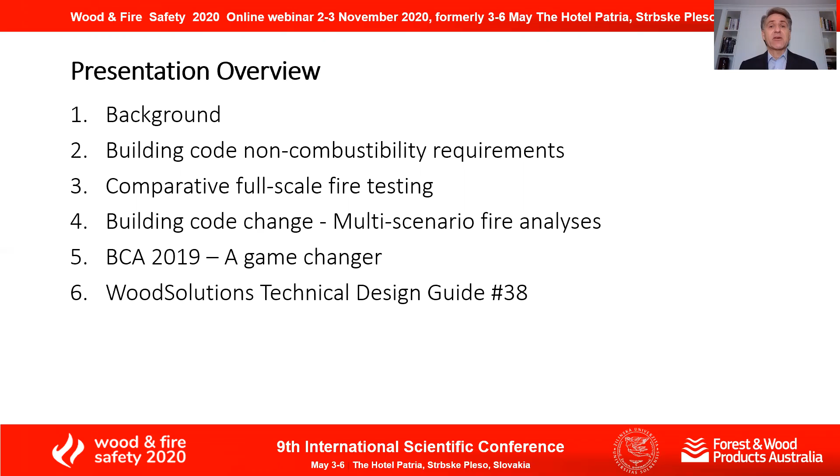Today I'd like to talk to you about the work done to enable a building code change for 8-storey timber buildings in Australia. I'll give you background on where timber construction has come from in Australia, talk about the building code non-combustibility requirements, the comparative full-scale fire testing, describe the multi-scenario fire risk analyses undertaken to enable the code change, describe what the code change is, and give background on where you can find further information on the fire analysis.

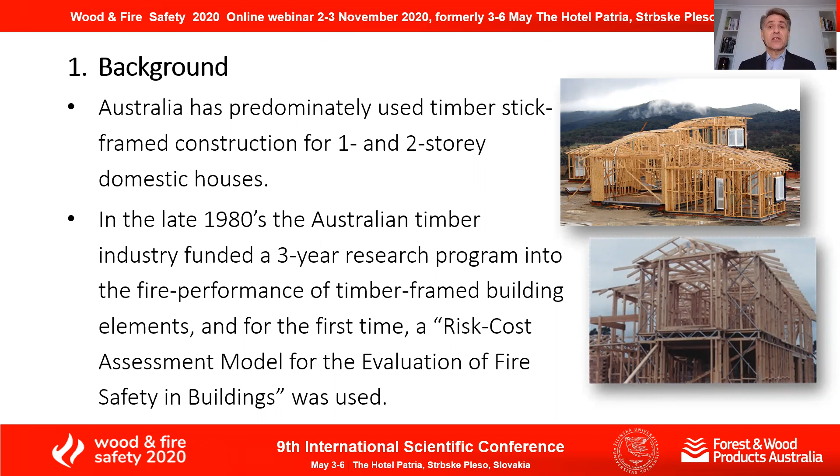Australia's predominantly been a timber-framed country, building 1- and 2-storey domestic houses. Back in the late 1980s, a major research project investigated the fire performance of timber frame buildings in apartment developments. For the first time, a risk cost assessment model was used to evaluate the fire safety of these buildings. As a result, a code change came into place enabling 3-storey timber frame apartment buildings to be built in Australia since around the mid-1990s.

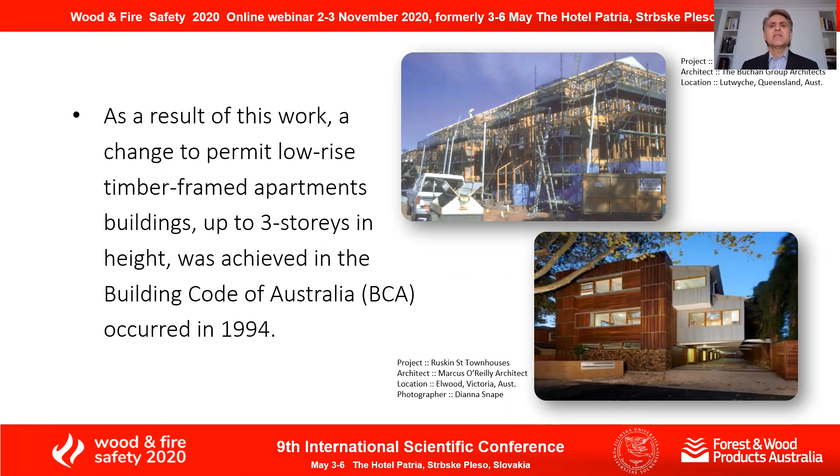One key reason changes occurred slowly is that our building code has a requirement for non-combustibility from a construction perspective. For buildings typically of 2 or 3 stories, depending on the type of building, there are non-combustibility requirements, and for some building elements those elements need to be either concrete or masonry construction.

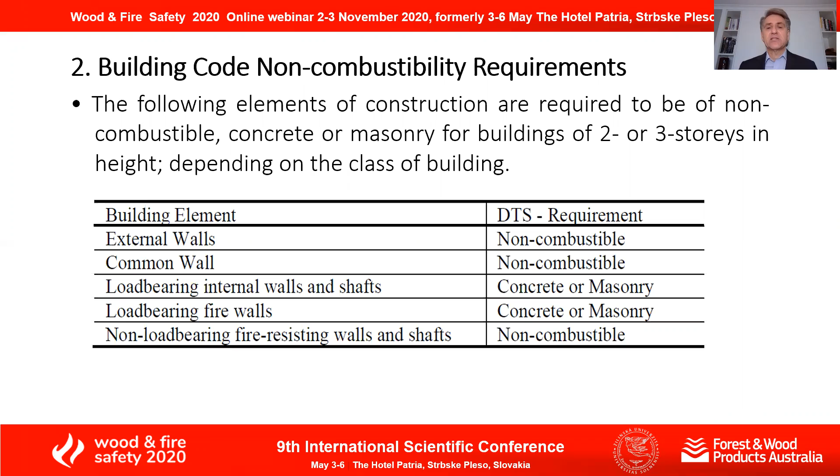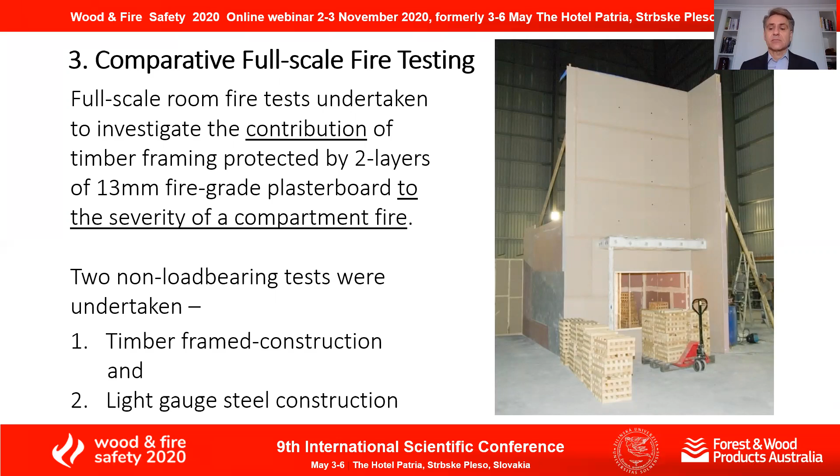Some comparative full-scale fire testing work was undertaken to look at the potential for increase in fuel load or fire severity due to the use of combustible construction, that is timber frame construction. Two identical tests were undertaken, one using timber framing, the other light gauge steel. The same fire load was used in both tests, quite a high fire load.

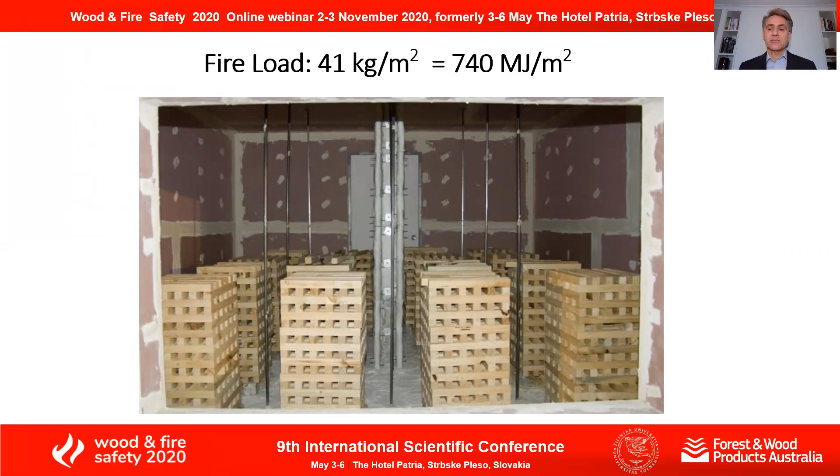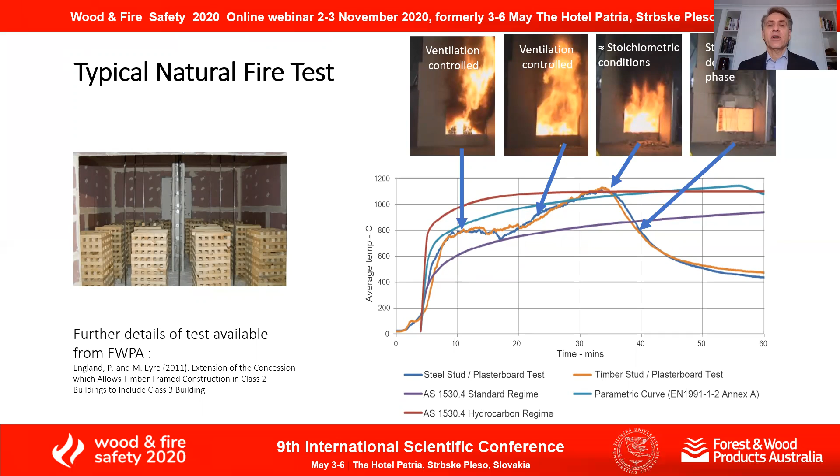The test went through the traditional fire phases, through to the maximum temperature, and then through to the decay phase. This demonstrated that with these fire protected systems, using fire grade plasterboard, the timber frame did not contribute to the fire, and there was no difference in fire severity.

So the performance was very well demonstrated, showing that timber in a fire performed very well in relation to its response.

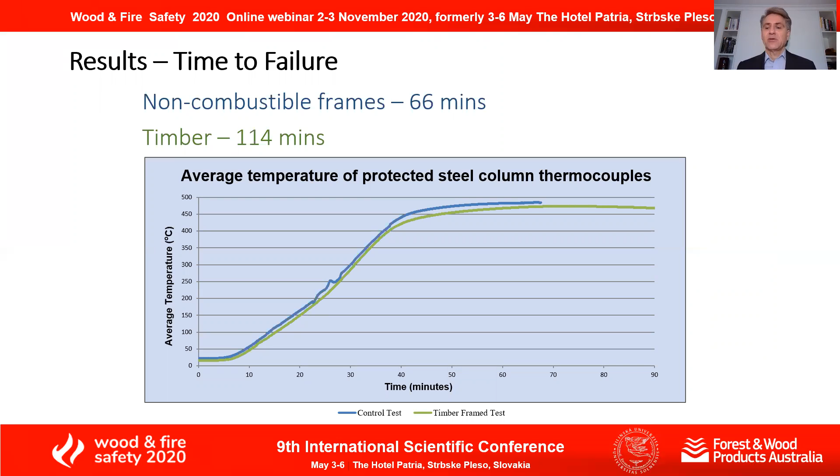Our building code has some mandatory requirements, termed the performance requirements. Every building needs to achieve fire performance, health and amenity, and energy efficiency. The key performance requirements are stated, and there are basically two pathways of compliance.

One is doing a performance solution, typically undertaken from a fire perspective by a fire safety engineer. You can come up with a new design that meets the performance requirements but isn't what's termed a deemed-to-satisfy solution. A deemed-to-satisfy solution is basically a recipe - follow the recipe in the code and you comply.

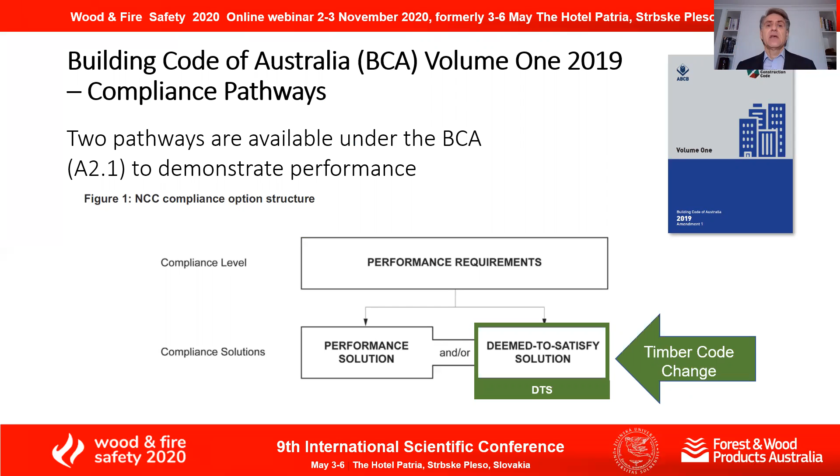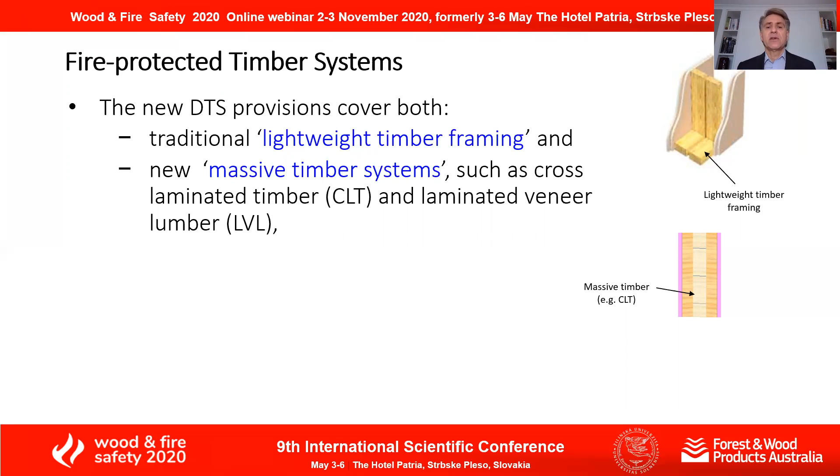That was the focus for the timber change - providing guidance or recipes as to how you can build a compliant building system. The types of systems we're talking about are fire-protected timber systems. These can be either light timber-framed building elements or massive timber systems, as we term them here in Australia. Our lightweight systems are traditional stick frame, and our massive systems can be cross-laminated timber, laminated veneer lumber, etc. They are protected by fire-grade coverings.

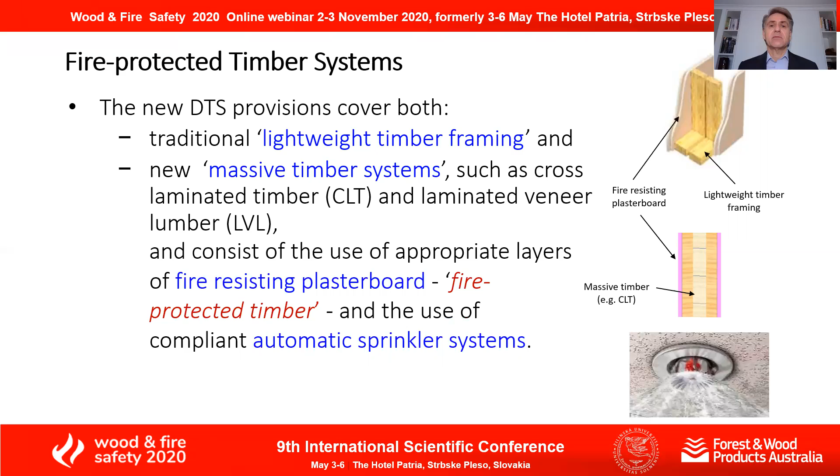These buildings also require the use of sprinkler systems throughout. This is the change requested to go beyond where we were previously, which was for apartments and hotel developments. The performance requirements in the Building Code of Australia, from a fire perspective - a couple of the key ones are stability during a fire and fire spread.

So looking at spread both within the building and beyond the building. As part of looking at those performance requirements, you need to look at the function of the building - hospitals or educational buildings - the fire load that can be present, any other hazards, the number of stories in that building, etc. So there's a range of things that need to be considered.

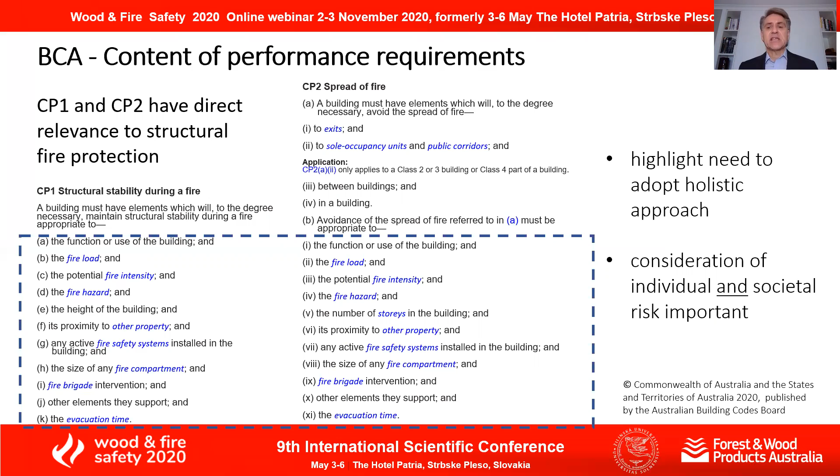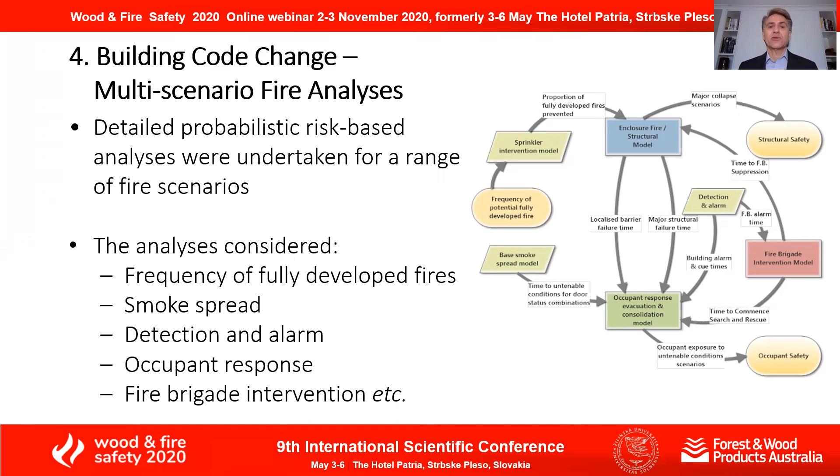So undertaking the proposal to change the code to enable timber buildings, all these aspects had to be addressed. In addressing those criteria, a probabilistic risk-based approach was undertaken, looking at a range of fire scenarios that could occur in the range of buildings. Things you need to consider are the frequency of fully developed fires, smoke spread throughout the building, detection and alarm systems, occupant response, fire brigade intervention, etc. There's a range of things that need to be considered as part of the analysis.

So looking to enable us to build timber buildings up to 8 stories, first a comparative risk analysis was undertaken, just based on published fire data. This was to look at the performance of various classes of buildings and enable us to group them into high, medium, or low risk type buildings.

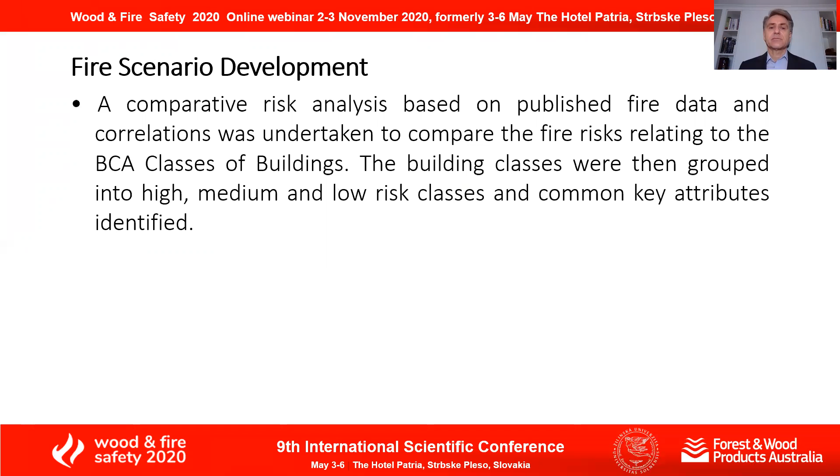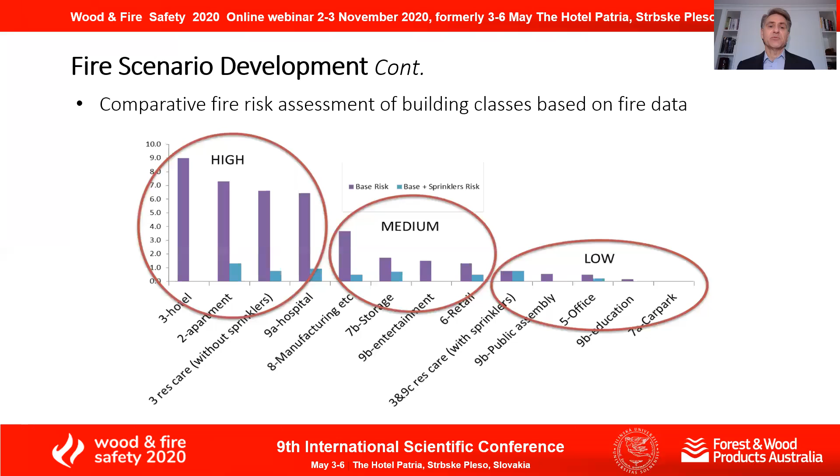The previous analysis we'd undertaken back in 2016 was for apartment, hotel, and office type buildings, and we used that data to then extend to other classes of building. As I mentioned, there was a comparative fire risk assessment undertaken where we grouped the various classes of buildings into high, medium, or low risk. But there's also a quantitative risk-based analysis that was undertaken to compare the fire risk and look at the performance within each of those classes of buildings.

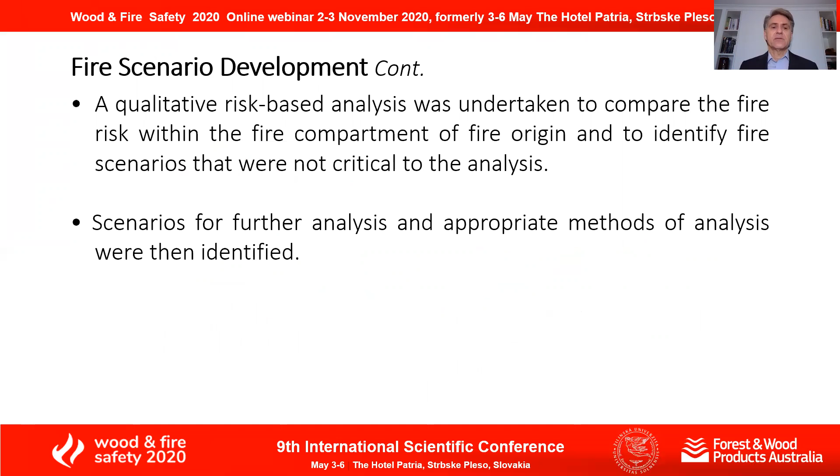We also used those to identify where some analysis wasn't critical, but also to identify the critical areas that required further analyses. So for the medium risk buildings, we looked at the occurrence of fire on the upper level of an apartment building. Obviously apartments, because people have the ability to sleep in those apartments and may not respond to fire cues, are high risk.

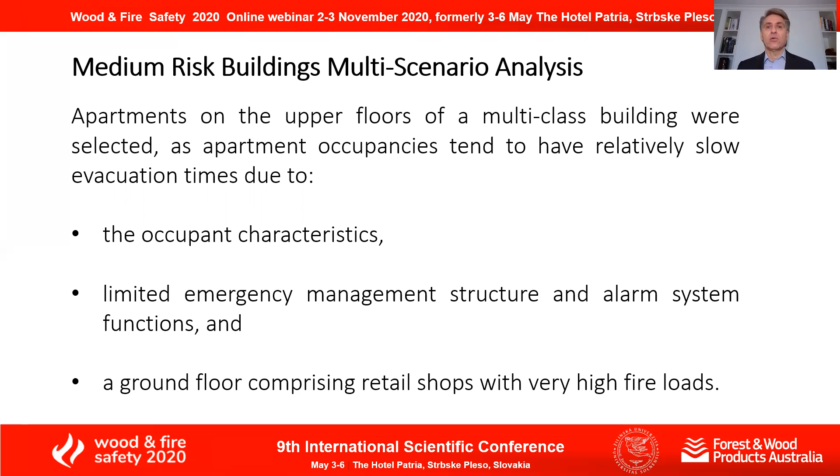The worst scenario is having an 8-story building with the top level apartments having a fire occurring, and then having to look at the occupant characteristics and ability to evacuate, as well as any other emergency management systems in place. One of the key risks would be where you've got a retail building at the ground floor level, which may have an extremely high fire load.

In looking at that comparative risk assessment, our traditional non-combustible buildings were deemed to have a risk of 1. Via the analysis, we demonstrated that timber frames had a comparative risk of around 0.16, and massive systems 0.11. The reason the massive systems are less is because of the mass of wood in those elements, such as cross-laminated timber or laminated veneer lumber panel. It has an inherent fire resistance as well.

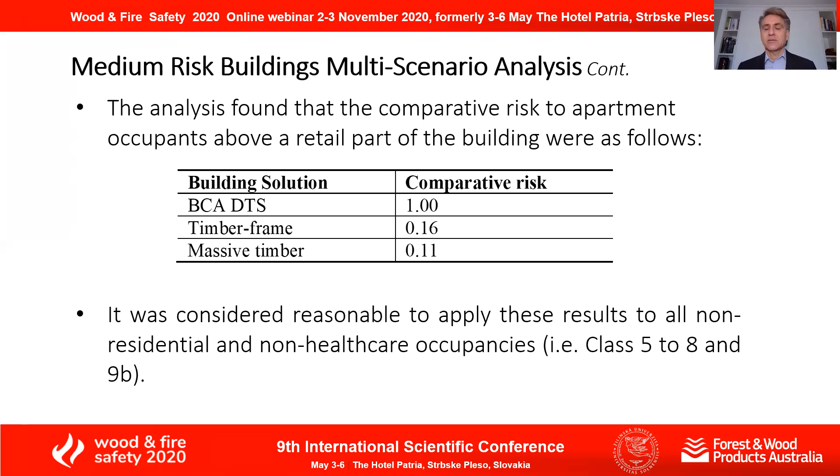It was considered, based on the analysis, that these would reasonably apply to other non-residential or non-healthcare type occupancies. From a high-risk perspective, that was broken up into a couple of key tasks. One was for these Class 9A buildings, typically such as hospitals, where under our deemed to satisfy, you could use just a zone pressurization system.

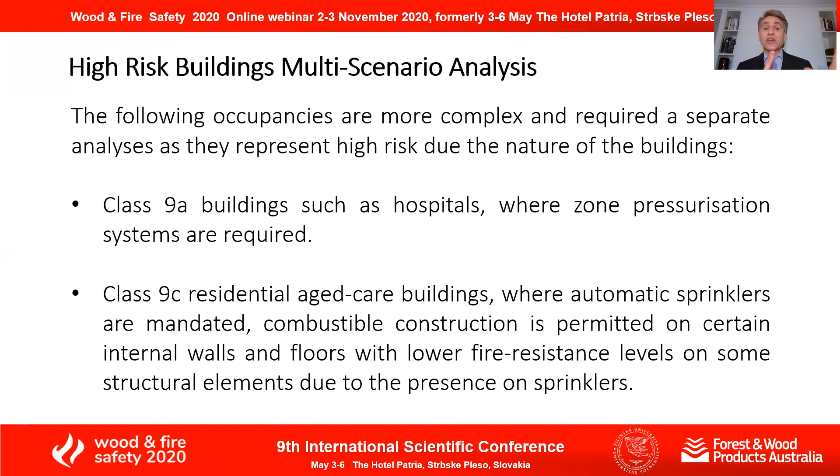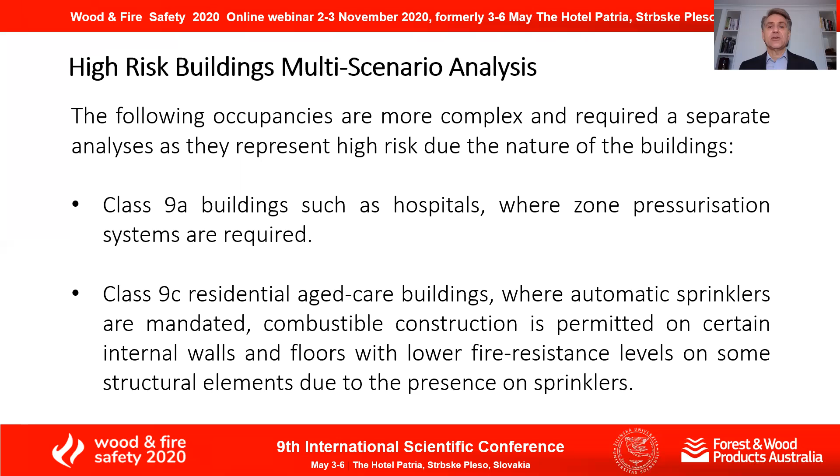For the aged care style buildings, our Class 9Cs, automatic sprinkler systems are mandated, so they are required. Although in our non-combustible construction, you can actually have some combustible elements. Certain internal walls and floors can be used also with a lower fire resistance level because of the use of sprinkler systems. So we had to take all of that into account.

The analysis found for our hospital type buildings there was a large reduction in risk to life, just due to the introduction of automatic sprinkler systems. The reduction was in the order of 60 to 90%. For aged care style buildings, the risk is similar because both our timber systems need sprinklers and the non-combustible buildings also need sprinkler systems. But the comparative risk, from that multi-scenario analysis, indicated that comparatively there was still a reduction in risk because of the use of these fire-protected timber systems.

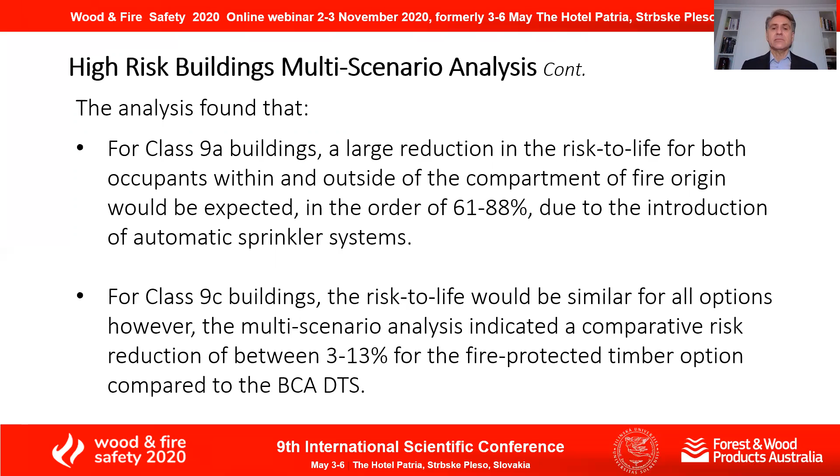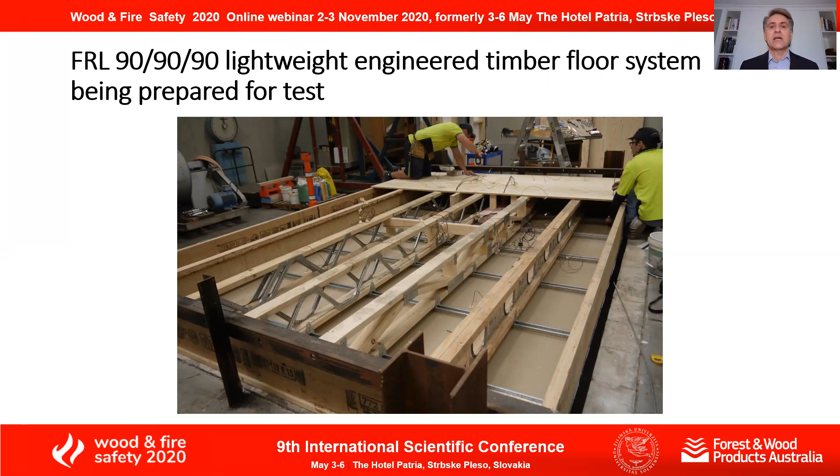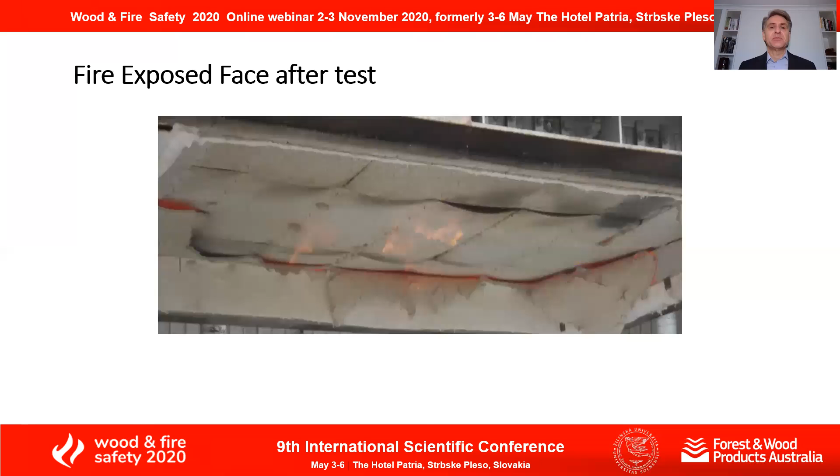One of the issues raised during the development of the code change was the performance of lightweight timber systems. So a full-scale fire test was undertaken to achieve a 90-minute fire resistance level. We used a range of different lightweight engineered floor systems or floor elements, with fire-grade plasterboard on the underside, and undertook a full-scale load-bearing fire test. The test achieved the 90-minute performance. As you can see, the fire-grade plasterboard took quite a bit of damage in the test, but the timber floor joist elements still managed to maintain load for the full test.

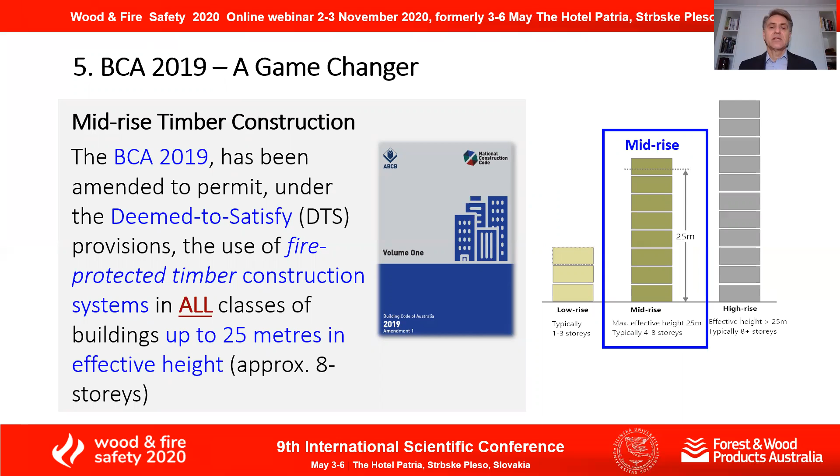So basically what has occurred through all this analysis and full-scale testing is we've achieved a code change in Australia as of 2019, which basically enables all classes of buildings to be built using fire-protected timber elements, be they timber framing systems, lightweight, or massive timber systems, up to around the 8-storey level.

There's a fair bit of work that went into that analysis, and it's described in a publication available free of charge online through the woodsolutions.com.au website. It's around 250 pages, and describes the work done to enable us to get a code change back in 2016, but the same approach is now being used beyond that.